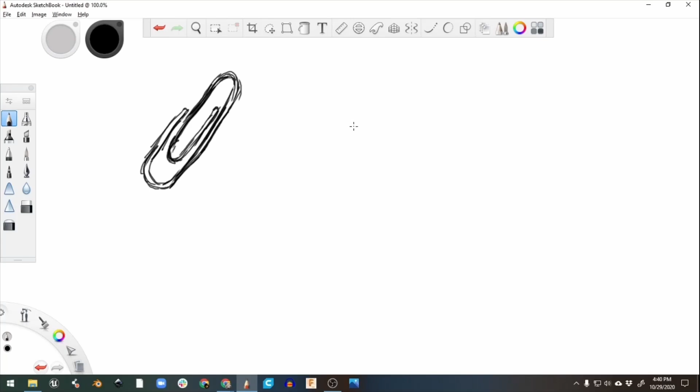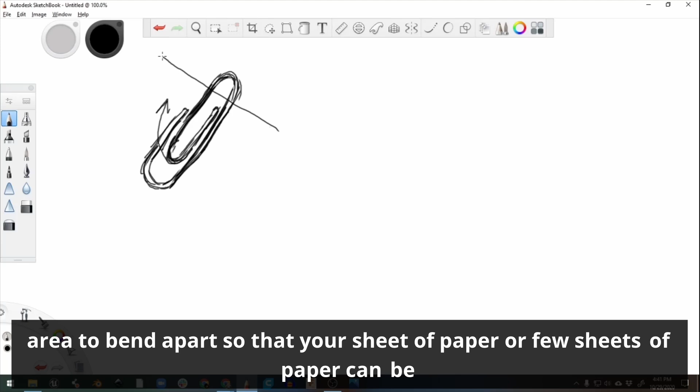So first, using this really wobbly drawing of a paperclip, I want to determine exactly what kind of shape we need to make it functional. The simple paperclip actually uses an internal area and an external area that bend apart so that your sheet of paper, or a few sheets, can be stuck in between them. So the only thing we need is an inner area connected by a very small or bendable part.

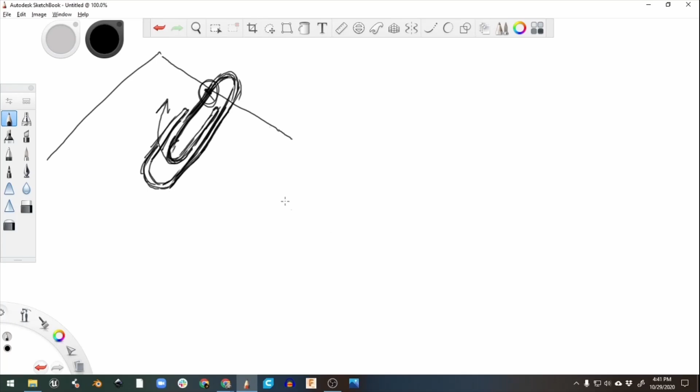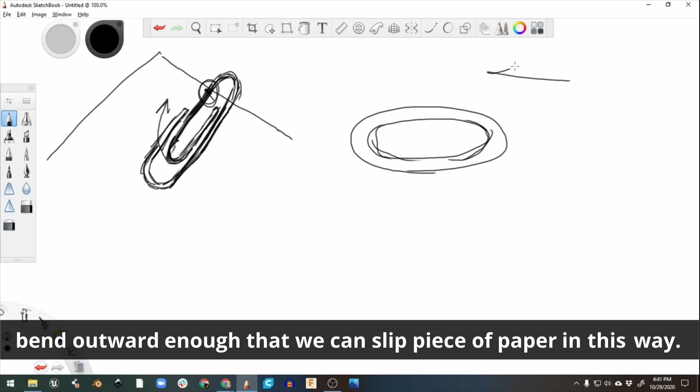So that we can slip it over some sheets of paper, I'm going to start by using an oval as my exterior shape. I know I can make a shape similar to this in Tinkercad quite easily. And the inside is going to need to be attached only at one point so that it can bend outward.

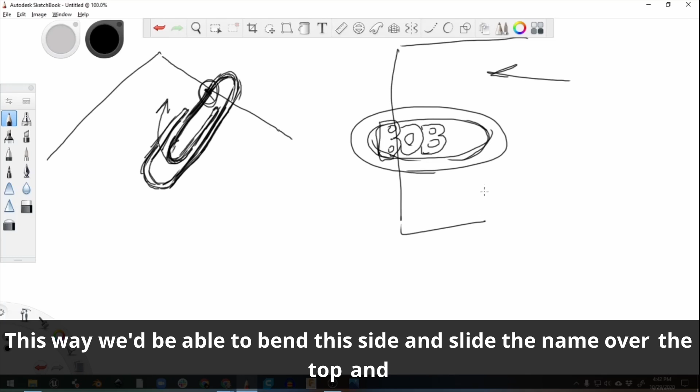Enough so that we can slip a piece of paper in this way. So if we wanted to do some text or a name, perhaps, we could attach the first letter and not any of the others. This way, we'd be able to bend this side and slide the name over the top and the ellipse underneath the paper.

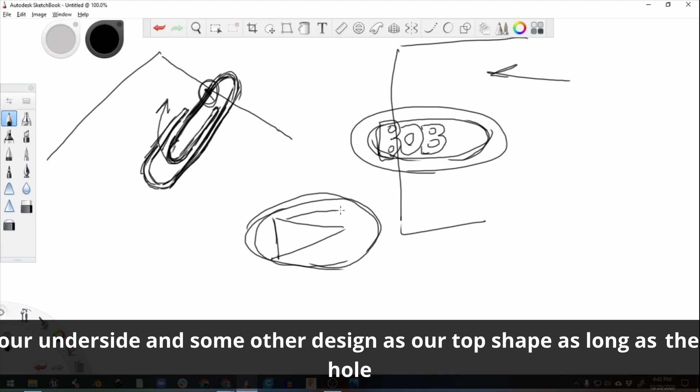We could also do this same thing with simple shapes, using our ellipse as our underside and some other design as our top shape, as long as the hole allows us to bend this point up, we can fit something in between them.

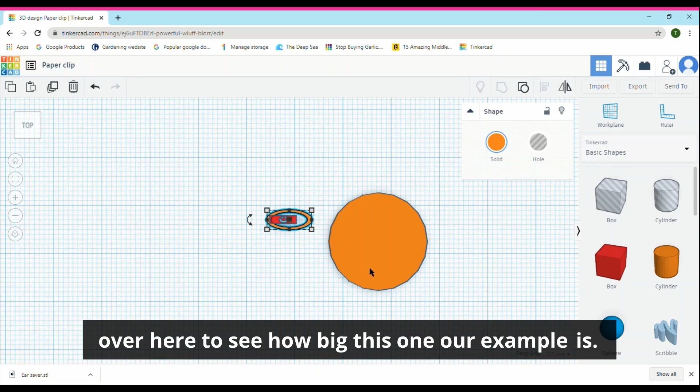First, we're going to get a cylinder and drag it onto the work plane. We're going to change the height to 1 millimeter and then use this box over here to see how big our example is. We'll change this to 4 millimeters and make this 9.25 millimeters.

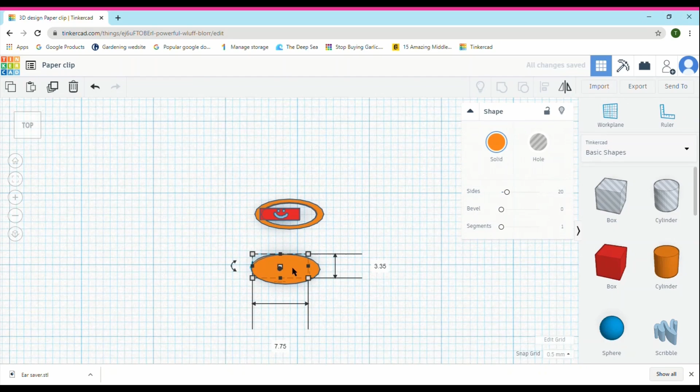Let's zoom back in and move this over here. We'll duplicate it and make it smaller by using these boxes over here to drag it. We'll make this a hole and use the align tool right here to align these together. Then we'll group these two.

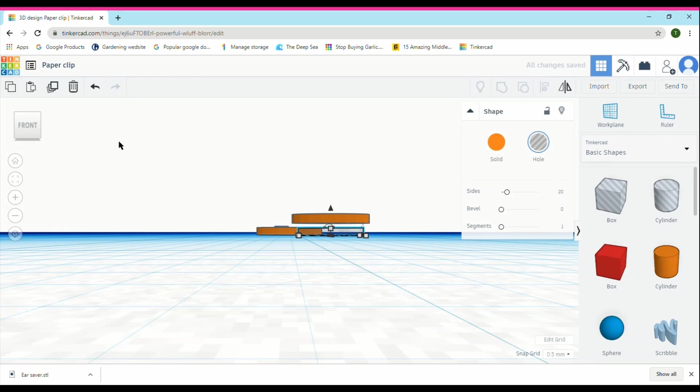After we make the hole bigger, like this, we'll group it. Now we have the paperclip part.

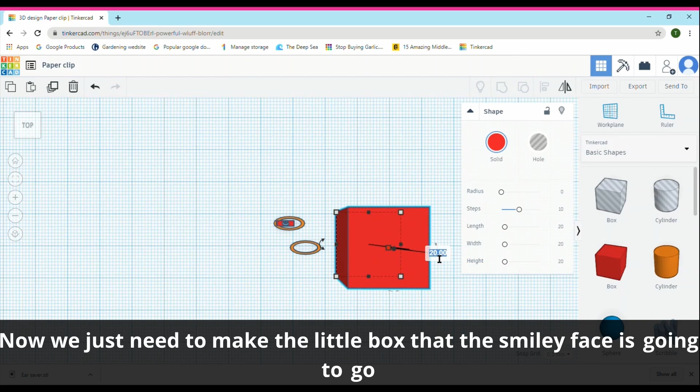Now we just need to make the little box that the smiley face is going to go on top of. We'll make this 1 millimeter too, and click right here and see how big this is. 1.50 and 5.31.

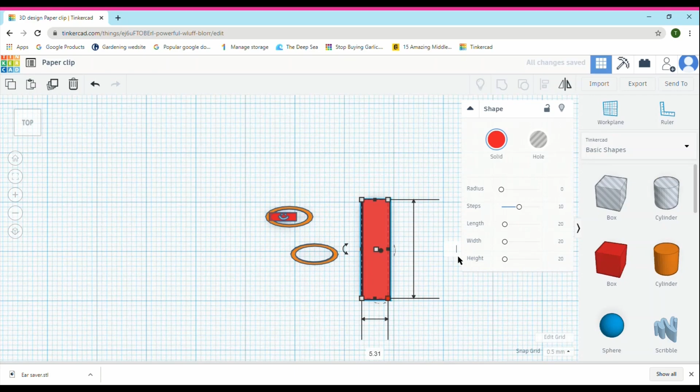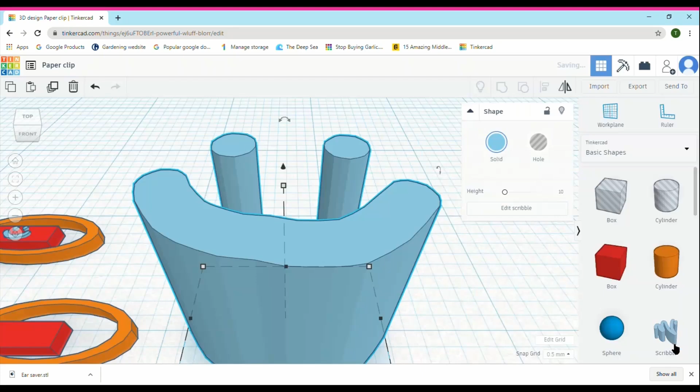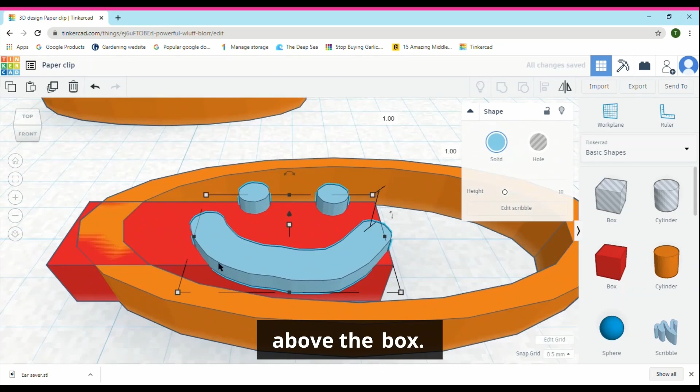Since we're done, we're just going to click done and make this 1 millimeter and make it smaller. We're going to drag it over here and use this arrow right here to bring it up above the box. We're going to zoom in and make it even smaller so it fits.

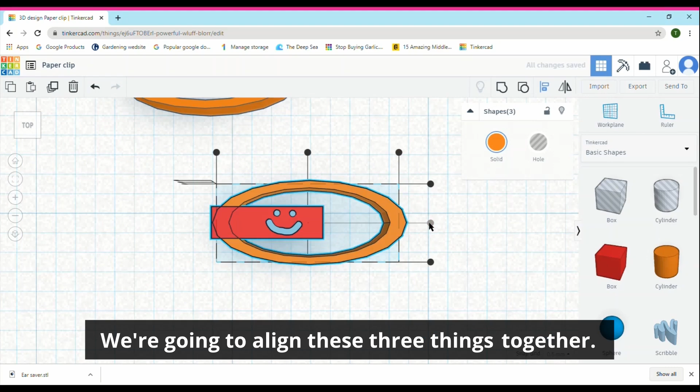We're going to align these three things together, and set up our paperclip designs to print. I'm going to use my original examples since they're a little bit larger, and I'm going to show you the difference between setting everything up as a single piece or having multiple parts.

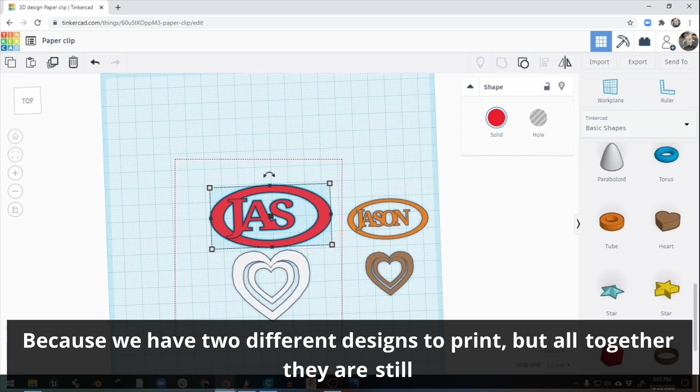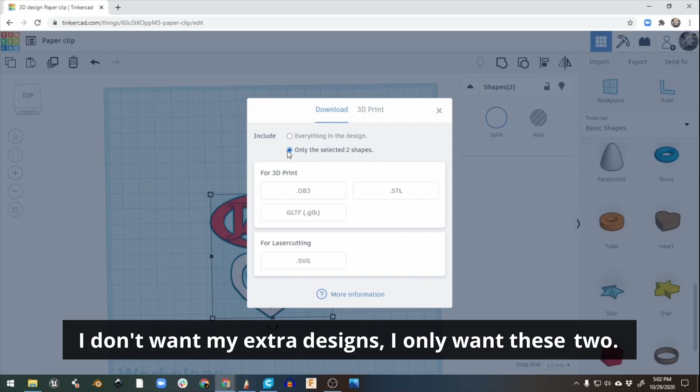Since we have two different designs to print, but all together they are still very small, less than 100 millimeters across, if I select both of these shapes, I can head over to the export feature, and we can see that only the selected shapes is chosen. If I hit everything in the design, I'll get all four. I don't want my extra designs, I only want these two, so we'll stick with the selected shapes and create an STL file.

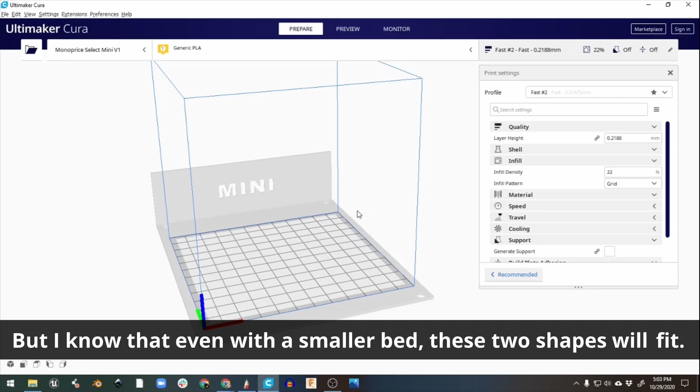Now if we move over to Cura for slicing, I have it set to the Monoprice Mini, which is a smaller printer. But I know that even with a smaller bed, these two shapes will fit. So if I click on Open here, I can go to my downloaded files and open up the paperclip. You can see that although both shapes have made it into our design, they are counted as one single shape.

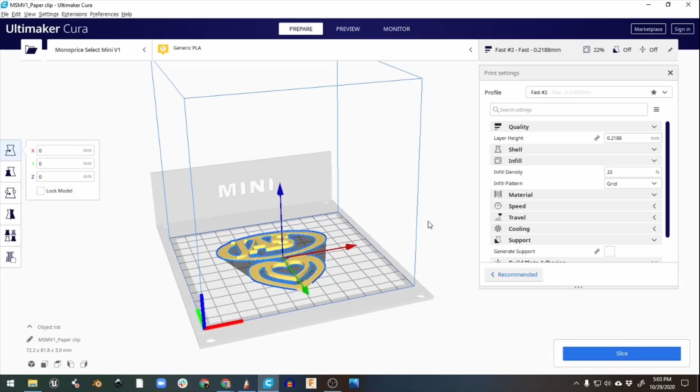I cannot move them separately from one another. If you have separate STL files, you can still add multiple small shapes into your print so that you can print them both at the same time. I'll delete these and head back over to Tinkercad and show you this.

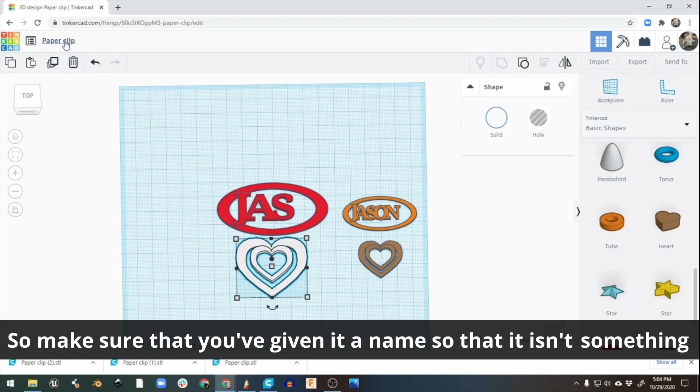So let's select just this one and export it as an STL. And then let's select our heart and export it as well. You can see that each time you export, it names the file the same as the name of your Tinkercad design, so make sure you've given it a name so it isn't something ridiculous. But since I've exported it 3 times, it numbers them, so I know that paperclip 1 and 2 are my 2 separate clips.

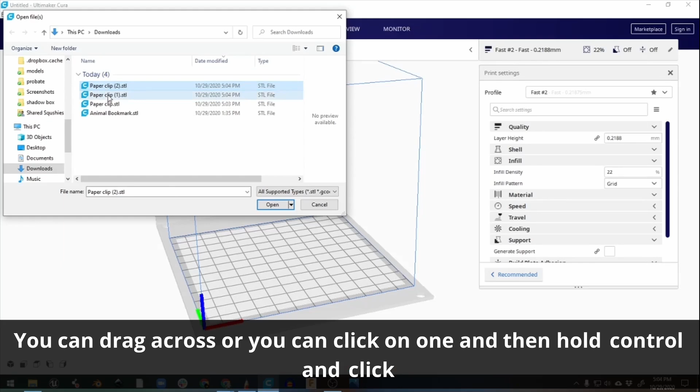So let's go to Cura, and when I open, I'm going to select both paperclip 1 and paperclip 2. You can drag across, or you can click on one and then hold Control and click on the next one. I'll open both shapes, and you can see that it's positioned them strangely. One of them has bounced off to the side there.

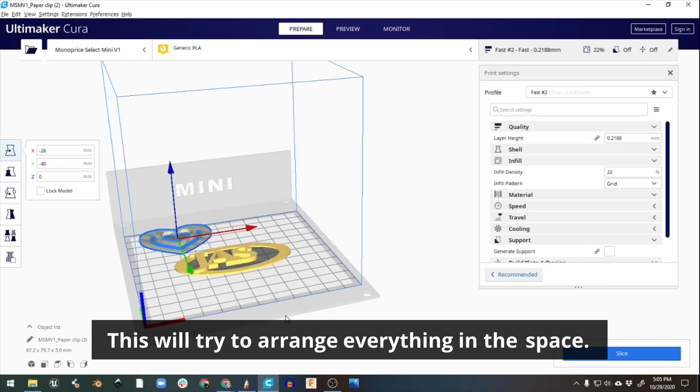We can manually move our pieces around, but if we right-click, we can easily tell it to arrange all models. This will try to arrange everything in the space. Looks like it was unsuccessful, as it put the heart up too high and it's marked as going off the side here.

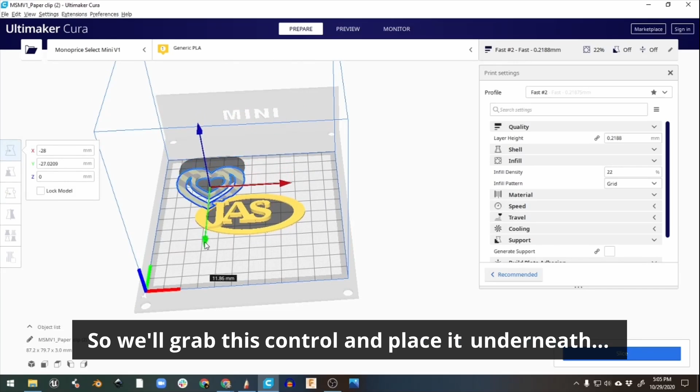So let's center everything and then try to arrange them again. Looks like its automated arrangement isn't so great. So we'll grab this control and place it underneath our first one. Then we'll select this one and move it up a little bit. Move this one up. Now we can get them both into the space.

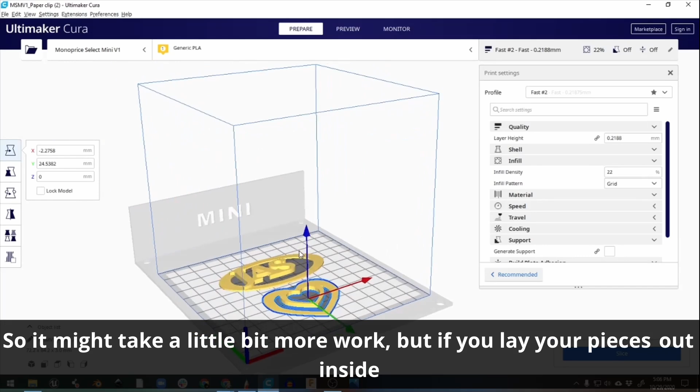So it might take a little bit more work, but if you lay your pieces out inside of Tinkercad, you can import them as a single object and go from there.

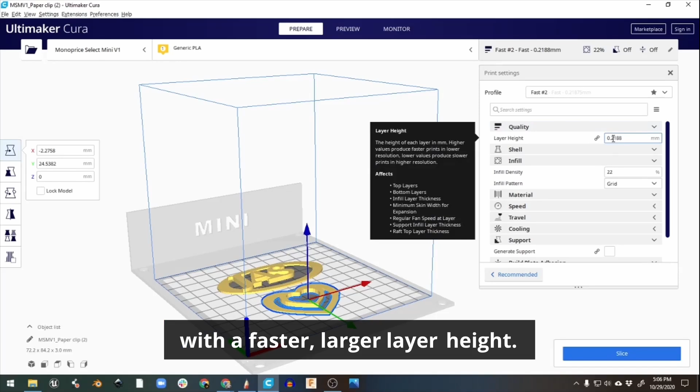Now that we've got everything fit onto the build platform, we can go ahead and slice it. Since the paper clips are extremely thin and not very detailed, we can go with a faster, larger layer height. We don't have to worry about how much infill, and we don't have to generate any supports.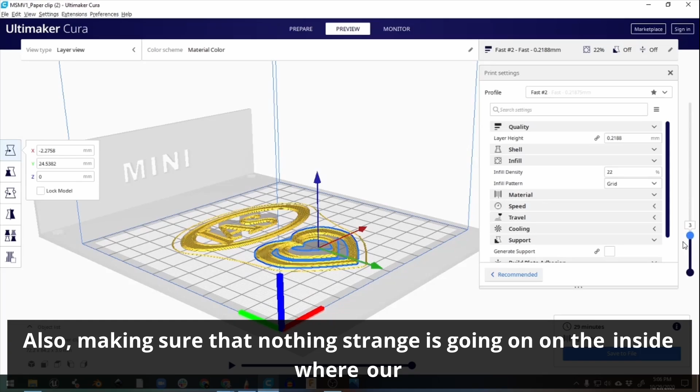Once we slice things, we always want to take a quick look at the preview and make sure that nothing strange has happened, making sure that our design is printing directly on the surface. Also making sure that nothing strange is going on the inside where our parts attach.

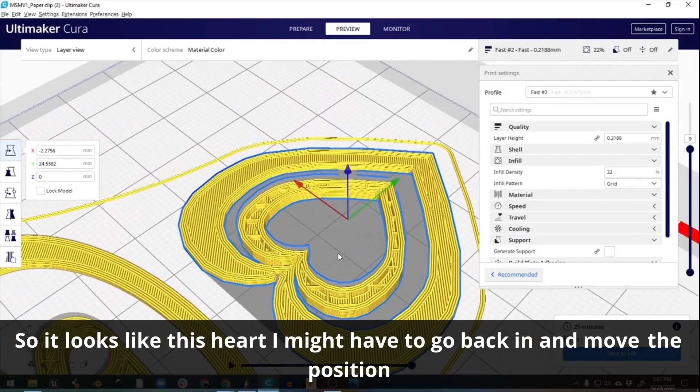If I take a look at this heart, it seems like the point where it attaches is very tenuous. So it looks like for this heart, I might have to go back in and move the position so that it overlaps a little better with my bottom layer heart. This looks like it's in danger of falling apart.

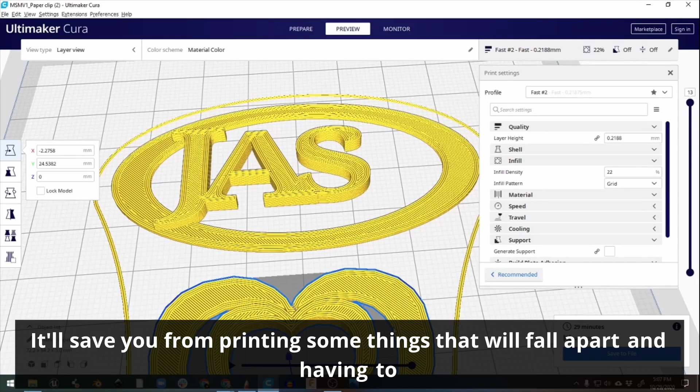So now that I've found this out, I can go back into TinkerCAD and make some adjustments and export it again. You should always double and triple check your files before you print. It'll save you from printing some things that will fall apart and having to print them again.

Once you've got all of your designs ready and you're sure they're going to print, then you can save to file and you'll be ready to send them.